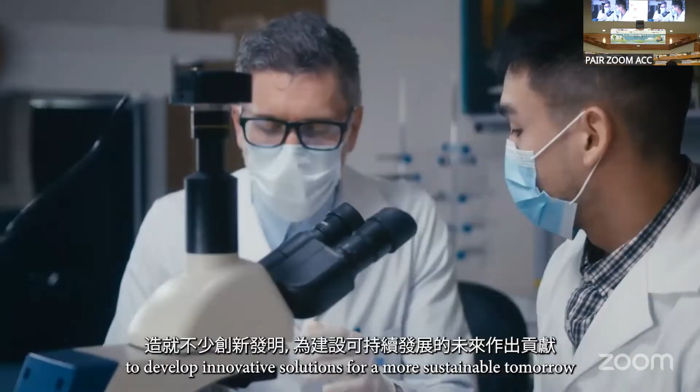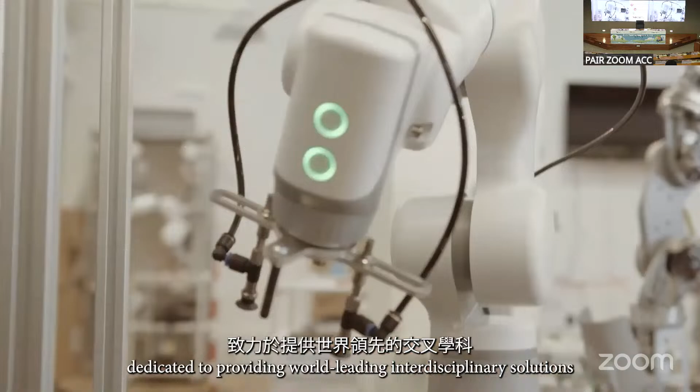The Hong Kong Polytechnic University, PolyU, leverages its world-class academic and research excellence to develop innovative solutions for a more sustainable tomorrow. In July 2022, the PolyU Academy for Interdisciplinary Research, PAIR, was established as the university's central research platform, dedicated to providing world-leading, interdisciplinary solutions to significant societal challenges.

PAIR is composed of multiple constituent research institutes and research centers. Each research unit focuses on a particular research area and is joined by researchers from various PolyU faculties, schools, and departments. These research areas broadly fall under three main themes, including advanced technologies and manufacturing, good health and well-being, and smart and sustainable cities. PAIR researchers develop new materials, systems, technologies, and techniques that support industrial modernization, upgrading, and transformation.

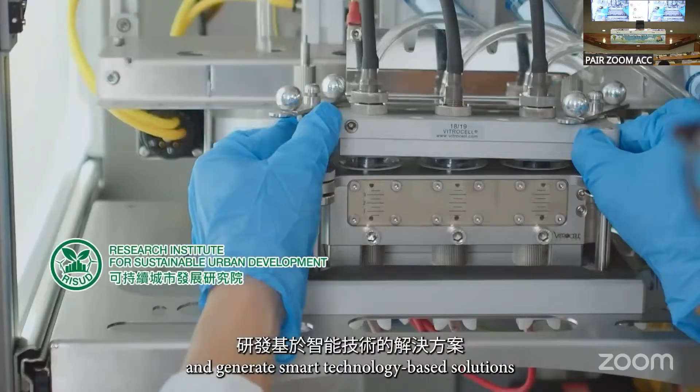They look into the factors and mechanisms influencing human health and wellness and develop evidence-based solutions, and generate smart technology-based solutions for making urban operations and services more efficient, connected, and eco-friendly.

We particularly value impactful collaborative activities in research and scholarship. PAIR researchers pursue research collaboration at different levels. In addition to interdisciplinary collaborations within and between research units, PAIR and its units establish partnerships with industries, governmental bodies, universities, and other external stakeholders.

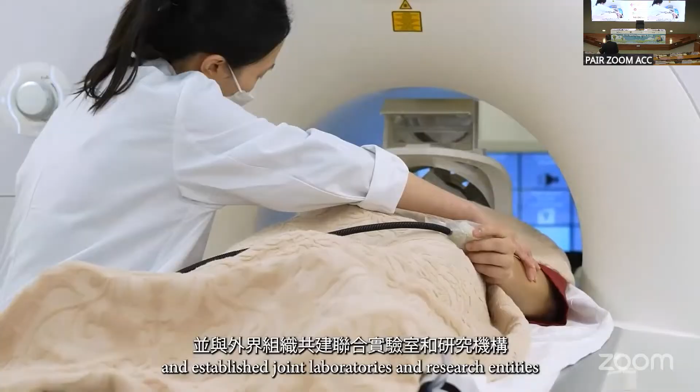With internal and external collaborations, we have successfully translated PAIR-led innovations into commercializable solutions and practical applications, and established joint laboratories and research entities with external organizations, driving scientific breakthroughs, innovation, and technology development, and socioeconomic prosperity.

PAIR's research excellence and research impact have been widely recognized at local, regional, and international levels. Our research outcomes have been published in leading journals, including Nature and Science. Innovations led by PAIR researchers have won prizes at various competitions and events, including the International Exhibition of Inventions Geneva.

Many PAIR researchers have been named among the world's top 2% most cited scientists in their own areas of specialty. Individual researchers have been selected to the National Academies of Science or Engineering and as fellows of professional associations, and have been bestowed with local, national, and international awards and honors.

Harnessing the strengths of PolyU's research and world-class scholars, PAIR will continue our unwavering efforts in research and scholarship, knowledge transfer, and collaboration to develop impactful solutions that benefit Hong Kong, the nation, and the world.

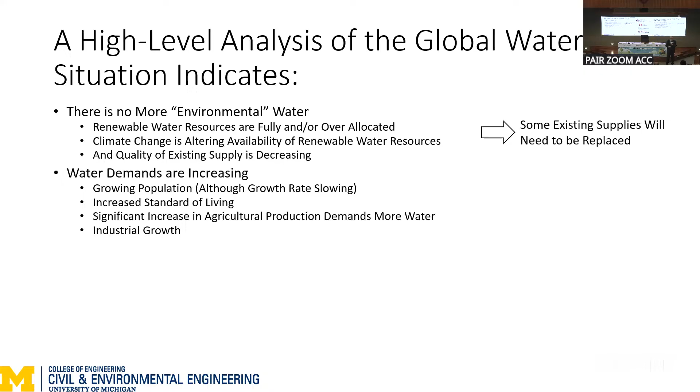Second, we have less water out of the environment, but water demands are increasing. It used to be population was what we looked at, but the demographics tell us that we're moving to a more stable population. There's increased standard of living, increased economy overall, which demands more water. But it's interesting, an observation is that over the last several years, new industries and existing industries are demanding more water. Think about semiconductors and data centers as an example of that.

So how are we going to meet that demand? New water supplies will be provided by, I borrowed this phrase from the Australians, manufactured water, desal, reuse, things like that. These are the future water supplies.

Third, the economic value of water exceeds the cost of service delivery significantly. People say, how can we afford water? Well, analysis after analysis after analysis says the broad economic and social value of water is about 5 to 7 times the cost of developing and delivering the service. 5 to 7 times. The challenge is that the benefits are more distributed, like enabling economic growth, health.

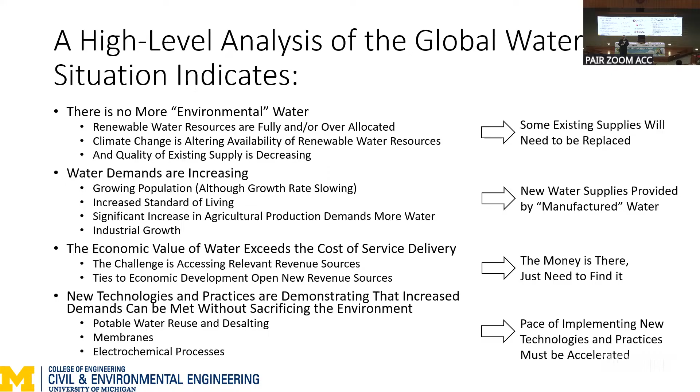For a long time I've been talking about the water profession really just needing to do three things. I'm going to add a little to this, but first the three things - there are obviously three really big things. Why three? Because people can remember three things. You try to tell people twelve things, they don't remember them. So we're going to go over these one at a time.

Number one: we as water professionals must fundamentally change our approach to water management to avoid water stress. Now what's water stress? It's not on a good day - it's when it hasn't rained for what seems like forever, or when it's raining like crazy. Droughts and floods. Droughts and floods.

What I'm going to describe here has been coined One Water - looking at the overall water system and optimizing it. In China, the sponge city - I like that term because it's very evocative, right? On the not-enough-water side, it's about a portfolio.

It was actually the Australians, in their millennium drought between the mid-90s and mid-2000s, who coined this phrase. A portfolio is a combination of different things, each of which performs well under different conditions. If you're a financial person, you look for a financial portfolio - this is exactly the same idea. So things that work well when you have plenty of environmental water, but also things that work well when you don't.

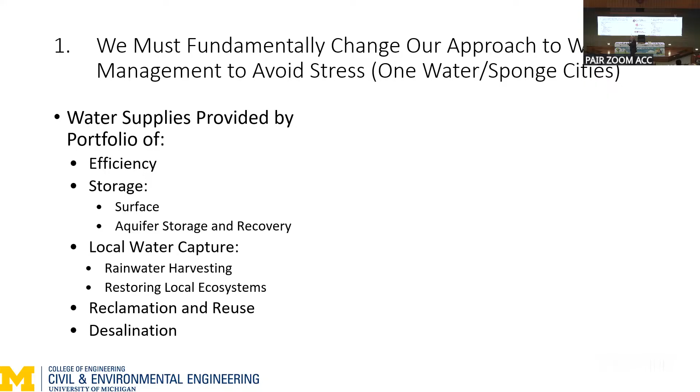You can read a lot faster than I can - you see the list of things here. Increasingly, water reuse is becoming part of that portfolio, and desal too, because these are things that work well when environmental water is not so available. Get the idea? The combination under different circumstances.

For flooding, the same concept is being articulated with different components. Traditionally what we've done is build pipes, swales, dams, dikes and so forth. Increasingly we're supplementing that, making a system that includes natural systems. We have to get away from this idea of designing to a target storm, because we don't know what it is anymore. Stationarity is dead.

So the evolving approach being enacted in a number of places is not to design to a given condition - a fully deterministic approach - but more a strategic approach. The strategic approach asks: when these flood defenses are defeated, where does the water go? This is where natural systems come in very well - systems that you can flood and return to service very quickly, and most of the time they're providing other values.

How do you pay for it? You recognize those other values. But also spatial planning - this is a nice term for saying let's move people out of the floodplains. We've built things in the wrong places, and we just need to move people to leave room for the floods. The Dutch were really the first to articulate this - they call it 'room for the river.' It's nice to have a phrase that conveys this, and it works. The good news is it works.

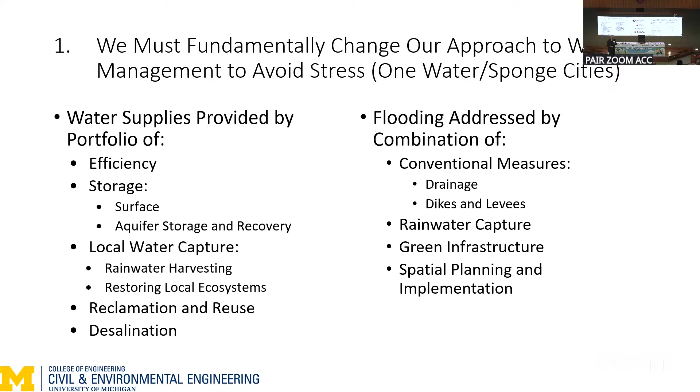Eliminating biases - I said we have to change. You can read through here, but when you look at water supply and wastewater management, this is the traditional approach, the things we've already done, or always done. What if we flip this around and looked, at least on an equal basis, at reuse - because reuse solves two problems. It solves the wastewater problem and it solves the water supply problem.

So you see how you practically think about One Water - look at those things that may not be the perfect solution for a narrow part, but things which have more than one benefit.

So you have to look at the overall value to cost, not just the narrow, but the broad value. This is not so hard, but it's a little different than we're used to thinking.

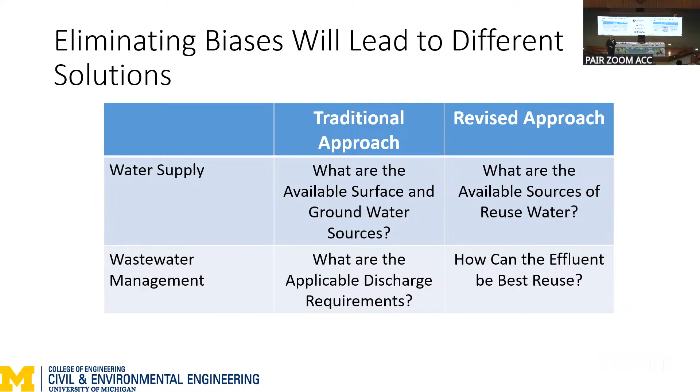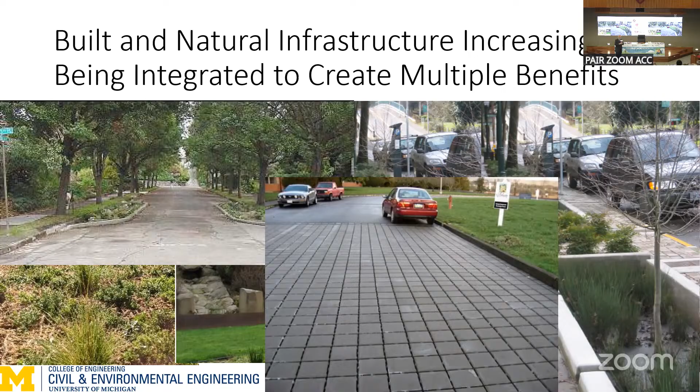Turning now to too much water, we are increasingly learning how to integrate these more distributed natural systems with the pipes and so forth. This is a great area of continuing advancement in terms of both intellectual knowledge and engineering practice.

That's number one. Number two, water management must become more resource efficient to sustain into the future. Resource recovery is a phrase that's often applied here.

What you see on the right-hand side is from the Stockholm Resilience Centre, one of their more recent assessments of where we are looking to overuse the sustainable resources of the planet. It's pretty simple. We got one planet and we're trying to use two or three. Obviously, that's not going to work in the long run, right?

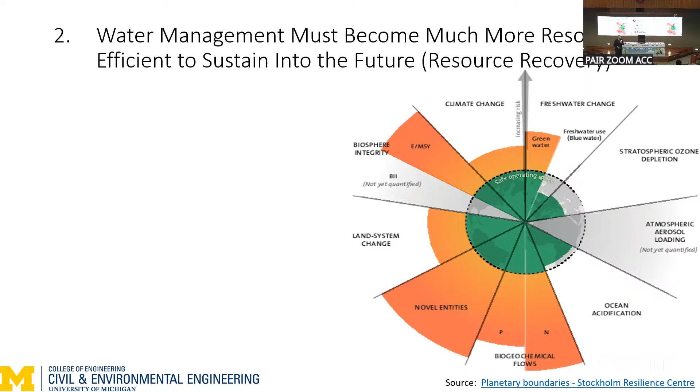Now, when you look at all these things, each and every one of them is actually impacted by how we manage water. Even things like biodiversity and land system change, in many instances, just because there are a lot of places we're taking too much water out of the environment. So our view needs to become expansive in that regard also. Where are we damaging the environment by the way we manage water? And there are plenty of places.

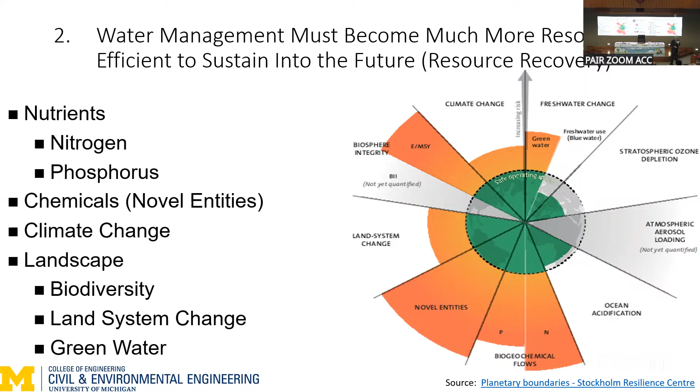Now, let me describe what I've just added to this, because there's a practical economic aspect as well. You see that line on this diagram and the arrow back? For 100 years, the costs of all kinds of commodities, metals, energy, and so forth were constant. That's what's shown here: the relative costs of things like ag materials, natural gas, metals, and so forth. Why was it constant?

It's because we had plenty. In fact, the cost didn't go up in spite of inflation because we got better and better at extracting it. What's happened is scarcity. What you see is the economic impact and the turbulence that's caused by scarcity.

If you're a water utility and you can produce the energy that you need to provide service, in spite of varying energy prices and spikes and so forth, you can cruise along and do your job. So there's a practical aspect of this as well in terms of managing water and extracting these materials. We're going to use some of them. They also can help us to finance as well.

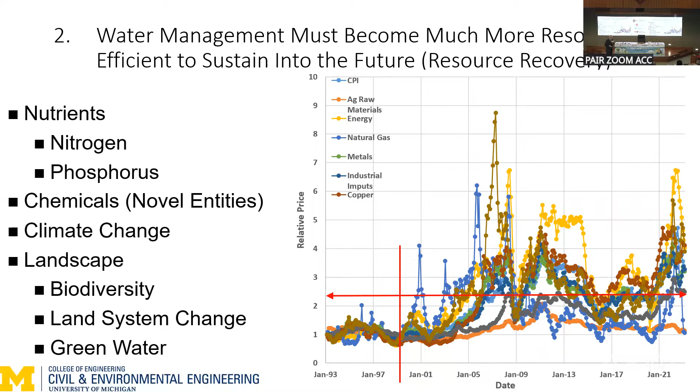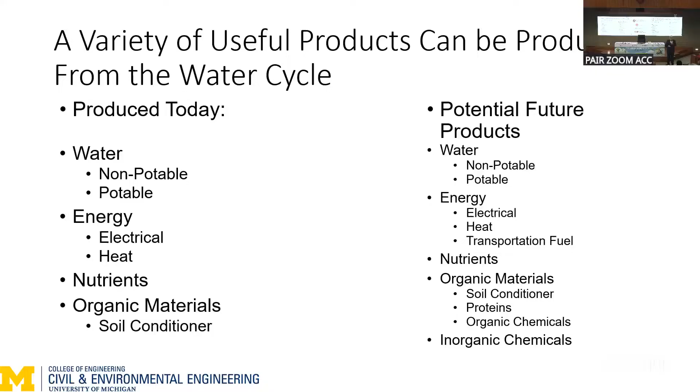Now, we already produce quite a number of products. Here's what we do today. And this is being extended fairly quickly to a broader range of products. The good news is we have many researchers all around the world looking to expand this significantly.

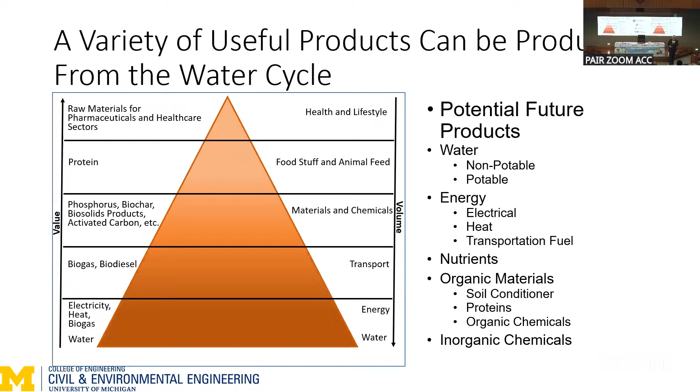One of the things about water also is that what we do here has the same components, but it's different than what we do elsewhere because you fit it to the local setting. We also need to look at our practices. We're comfortable working on technologies in the laboratory and so forth.

Why do we mix them up? You asked me that during the discussion. We did it for some logical reasons, but there are logical reasons that don't apply anymore.

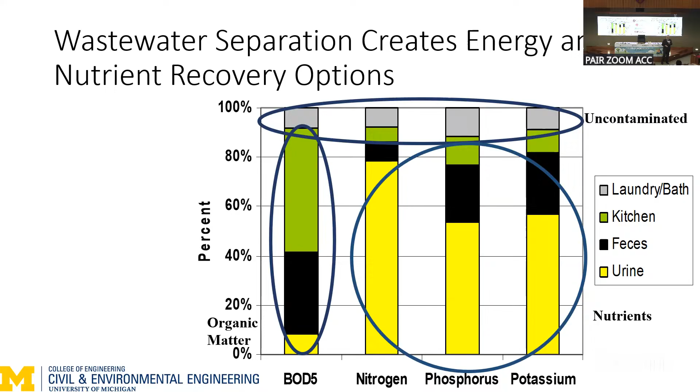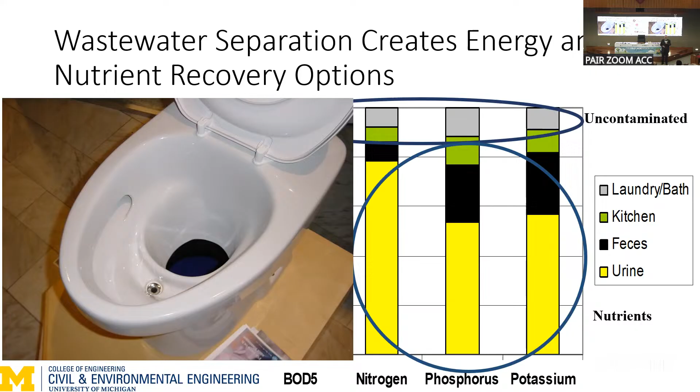And here also, part of this is working with people. So actually we can do all the processing that we need to do. It's about getting people comfortable. This is a urine separating toilet, and there are even improved versions of this now. So a lot of this is working with people to get this done. A recovered material is a resource only when it's used.

This is also an important area of investigation, because if we recover a little here and a little here, different utilities, different locations, we very well might not have enough to actually turn this into a product with enough volume, the right timing, and so forth.

So a little story - I learned this, I actually had this idea from Mark Van Loosdrecht, but it really resonated with me because Mark said, well, what about milk farmers? What about dairy farmers? My brother just retired fairly recently. He ran a family dairy farm for 30 years. His milk had zero value on his farm. The reason he was able to support his family for 30 years was the fact that he was part of a co-op - a nonprofit that aggregated the milk from 100 families and turned it into products.

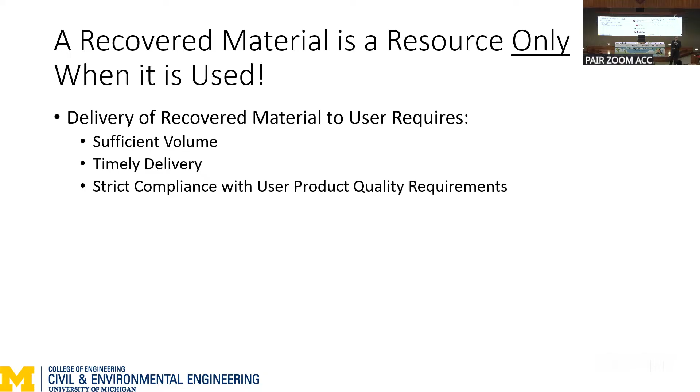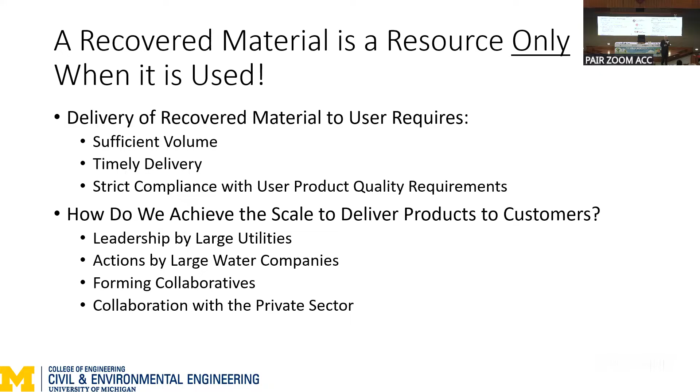So you see the kind of thing we need to be thinking - just because you make a little bit of something doesn't mean it has value. So this is really, I think, about getting scale. And I think we have partners - both the larger utilities, but also the large water companies, and also the private sector - that can play a role in this. This is just bringing some basic business sense to this. We can figure this out. We can do this.

We know how to do these things. These are kind of the physical things and so forth. We know how to do these things. So the first thing is to put everything on the table - good American saying, right? Put everything on the table on an equal basis, take the bias out.

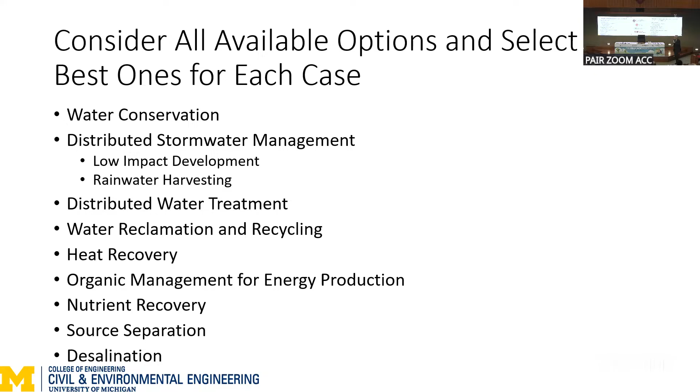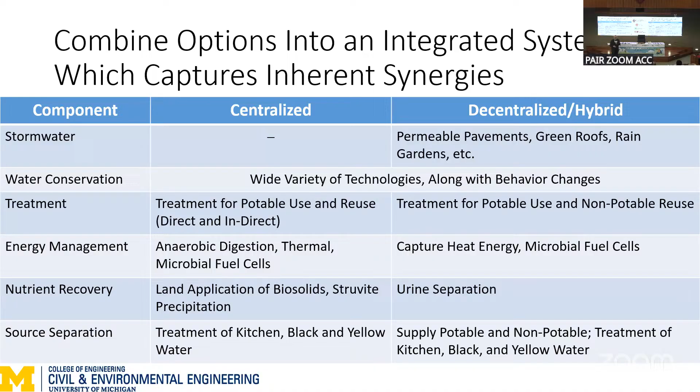Then look, in a given circumstance, how to put them together into good systems. And a system can have centralized components, but also decentralized components. Decentralized components are ones that are slowly being added, and we need to accelerate the pace of doing that. If you're going to reuse water, the best thing to do is to do it on a more local basis, for example. Thing is, we have the technologies to do these today.

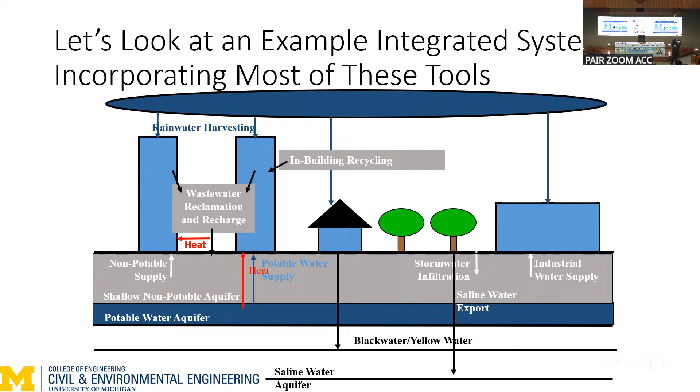So this is a little cartoon I put together a long time ago just to give you mentally what these things can look like, particularly with these hybrid systems that combine centralized and decentralized systems.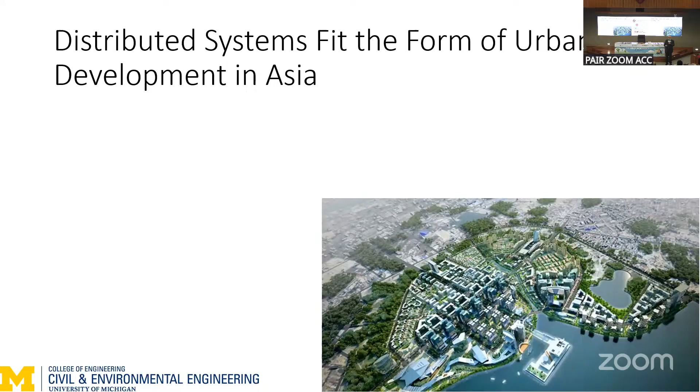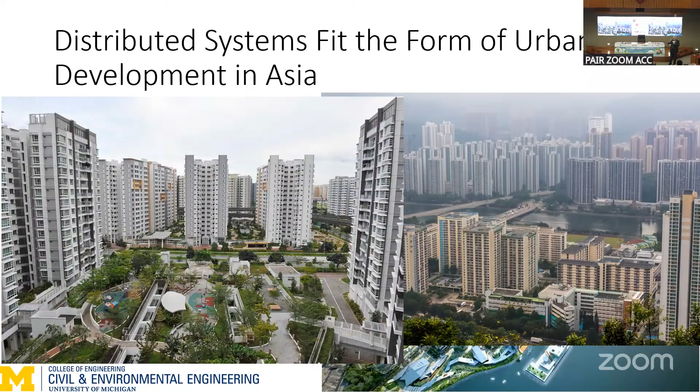One slide specifically for this region - distributed systems fit the form of urban development in Asia. These are just some photos off the internet and so forth, but you guys know this, right? These 6 or 8 or 10 or a dozen high rises - that's the perfect scale for decentralized water management at that level. So you've got plenty of people to create economies of scale, but you don't have to move water long distances and so forth. This is a missed opportunity in Asia yet.

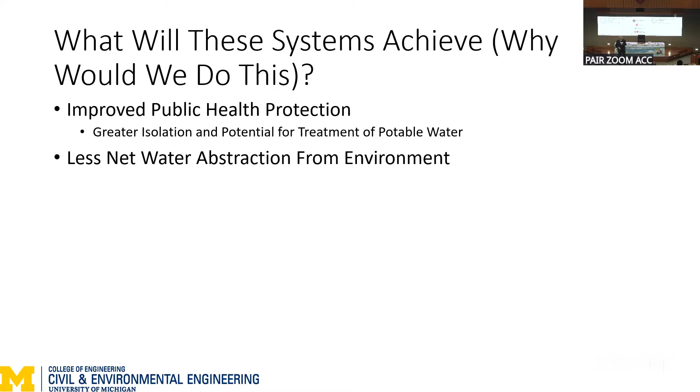So these systems - people start worrying about reuse. You can actually improve public health doing this well. You take less water out of the environment, which we're going to need to do. Reduce environmental discharges - people complain about increasing treatment to put it back in a receiving stream. They say, well, this water is too good to throw away. Let's use it, let's use it. Reduced resource consumption.

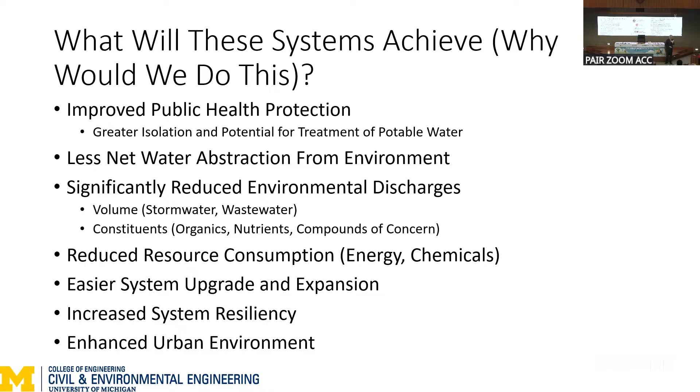Source separation dramatically reduces the energy that's needed, because you extract energy out of the chemical energy. You produce a lot of great water out of the gray water with a lot less energy - very clear. Easier system upgrade in the distributed components. Increased resilience because you don't have points of failure. An enhanced urban environment, especially when you can incorporate natural systems.

So these are the first two. Number 3: the human right to water and sanitation must be extended to all. I speak here as an American - there's a tendency to say, well, this is about people in developing worlds, developing countries. Even in the U.S., we don't do a good enough job of this. The human right to water and sanitation - what you see on the right-hand side here is a diagram out of the manual that the IWA produced when the UN adopted the human right to water and sanitation. And it shows you the identified components of this.

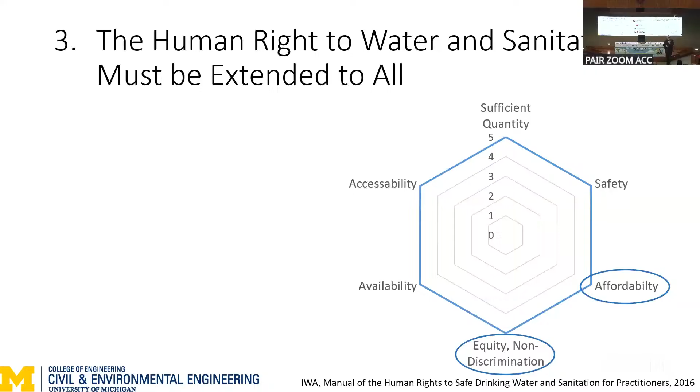And I want to highlight these two: sufficient quantity, safety. These are things that we know how to do. This is one of the challenges here - they're solutions, though. So again, returning to the benefits of effective water management, the issue is that from an affordability perspective, the benefits are distributed. When we try to pay for all of these things out of user rates, you can get to the point where there are folks that just can't afford it.

And does everybody have to pay the same? The answer is no, but this becomes a barrier in many instances. It means there's going to be a need to subsidize some users. It's that simple.

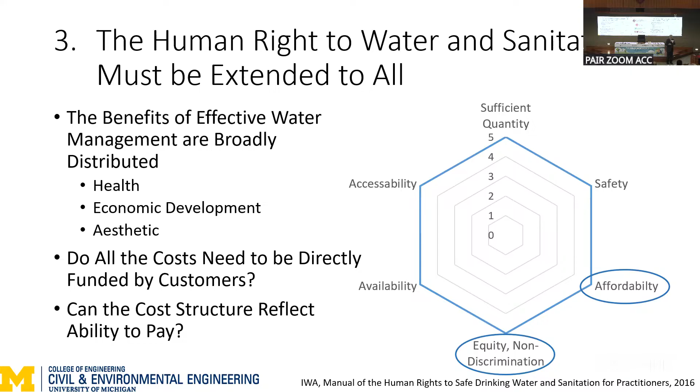Can the cost structure reflect the ability to pay? The answer is yes. Plenty of examples around that, but we just have to think creatively about our cost structures. There are numerous approaches available to address affordability.

If you're in a developing country, the challenge is building infrastructure that has taken the developed world 100 years to build, and you want to pay for it with 20-year bonds. This is not complicated. Financing tends to pay back over 20 years, but you're trying to do 100 years worth of work and pay for it in 20 years.

This is where you get into tariffs, taxes, and transfers. But also, there are some creative things.

DC Water in the U.S. was one of the first to do this. They're extending their sewer system, and they sold 100-year bonds. So this infrastructure is here for at least 100 years, and we'll pay it back after 100. So they sold those bonds.

Understanding the role of the private sector—there's a lot of misunderstanding here. The private sector doesn't fund this, meaning pay for it. Government and users have to pay for it. The private sector can provide financing, which is lending money, and they can bring efficiency and so forth. A lot of the failures of private approaches have failed exactly because of this lack of understanding.

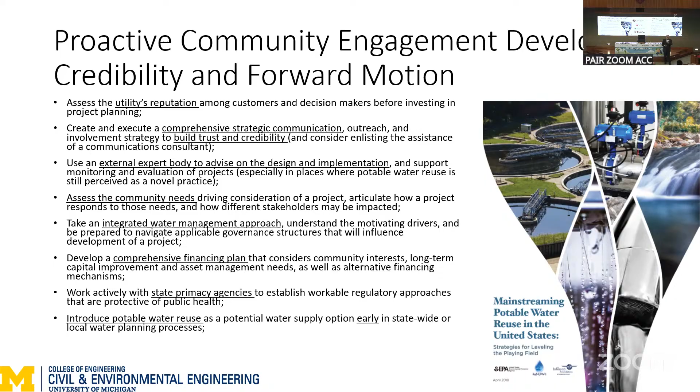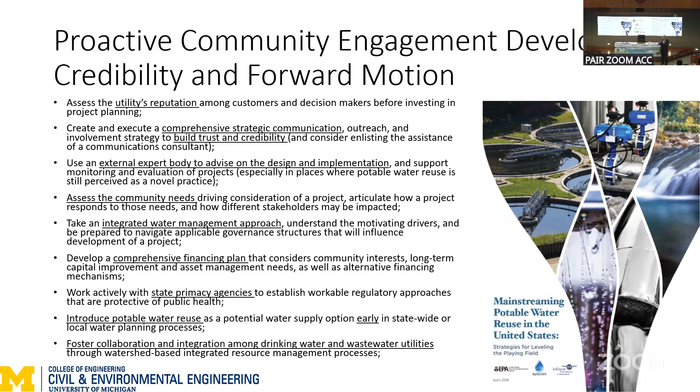Introduce potable water reuse, but this can apply to anything, as a portion of this overall plan. Don't sell it. Help people come to understand that it'll work, and foster collaboration and integration among the various utilities. You don't have to be a water cycle utility to do this. You just need to have relationships with the other utilities. People that do this are successful, and there are many that do this, but not enough yet. So those are the three things.

Let me come to some other things I want to put on the table. Natural systems, I've already talked about for flood management, but natural systems provide a diverse array of services. So water supply, certainly. Protected watersheds are something which are all around the world, both because they secure the water supply, but also quality. Water storage, in various fashions - I've already talked about where do you flood in urban areas and so forth. Water conveyance and retention, so restoring streams.

And the good news is everything I'm talking about, the pace of implementing is going up. But all of these are services that we get. Some of them related directly to water, some related to other things. So water treatment, land stabilization - both erosion control and when you're looking at groundwater, avoiding land subsidence. Temperature regulation, pretty important in urban areas. And physical health.

Recreation, we don't tend to think about that, right? That's a real benefit. And mental health. It is a proven fact that if you are a patient in a hospital, if you can look out your window and see a tree or something like that, you get well faster. It's a proven fact. And communities and families using the natural environment that's there - think about that value as well.

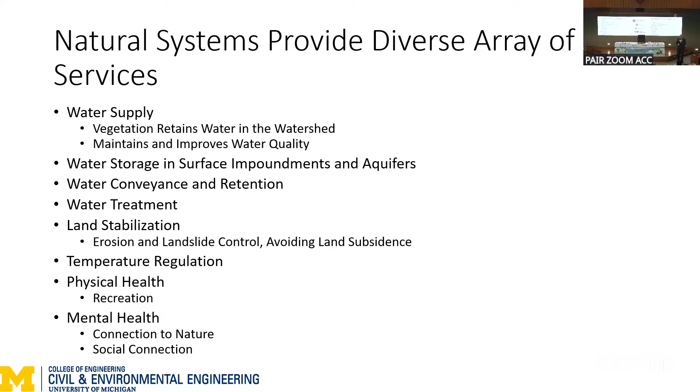So what might be the components of a resilient water system? Resilience is something that we talk about. So an integrated rainwater, stormwater management system - we've already kind of introduced that. But again, it needs to be integrated with spatial planning. Why do the utilities need to have a great relationship with senior government? Well, they need to be at the table when planning is done.

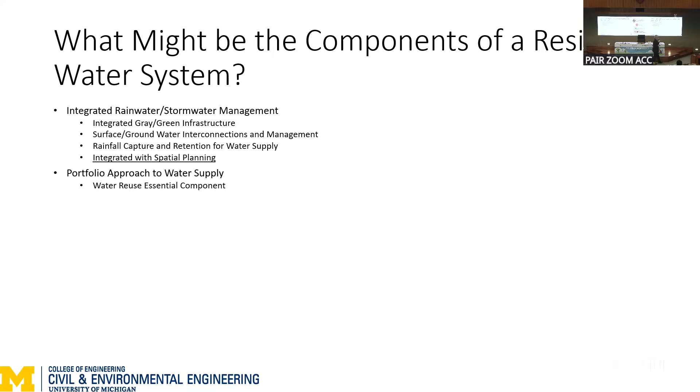Portfolio approach to water supply, and I've already made the case for reuse. Reuse, systematically, more potable reuse is systematically more cost-effective and more resource efficient than seawater desalination. It's very simple - pushing water out of something with a TDS of 35,000 versus pushing water out of something with a TDS of 1,000. It's the same technology, but there's just that systematic difference that'll always be there. And the wastewater is always there.

Resource efficient, I've already talked about this, but adding some things - continuous restoration of the natural environment, making that part of it, looking for those opportunities as components of the system, recognizing the broader value that they bring as well, and looking to bring that at least into the discussion.

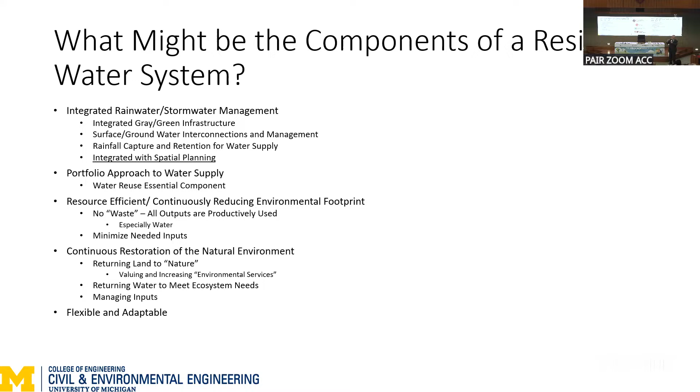Flexible and adaptable, because we live in a changing world. As we put things in place, think about the different ways they could be used in the future. I've been designing systems for over four decades. I have redone twice some facilities I was involved in early in my career - we always did something different with them. I've learned to think about, when I'm designing something, not what is the perfect way to use it for the current purpose, but how can things be used differently? And if you think about it, it's amazing what you figure out. If you don't think about it, you miss an opportunity.

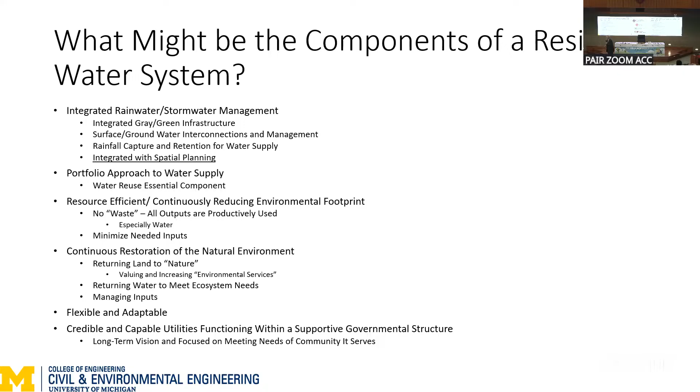Credible and capable utilities - and this is, to a certain extent, where the rubber meets the road, in terms of where things get done or they don't get done. The long-term vision, but then within that vision, doing the things that are needed today to provide the service. It's not either or. You have to know where you're going and then take prudent steps to get there.

So how do we achieve systems of this type? I will tell you that there are many utilities around the world that are doing this very well. So what are some of the tricks of the trade for them that get them there? It starts with developing a vision, but it's a vision that aligns with the physical realities, given the circumstances - and a vision is not prescriptive. Given the water that's available, the geology, the topography, if you have existing development and so forth, what are the things that are possible? And given what's possible, open up your mind to how those constraints - those are constraints - but what you can do within those constraints.

Always with the objective of the things that are listed there: managing the storms and floods more effectively, increasingly effectively, because what we have now in terms of intensity and duration of storms, it's going to become more, we know that. Water supply: how can we increasingly use what we have to increase our water supply, even when natural water is being reduced? We can do this. So the vision is that integrated picture and the components we might want to deploy and the options we have.